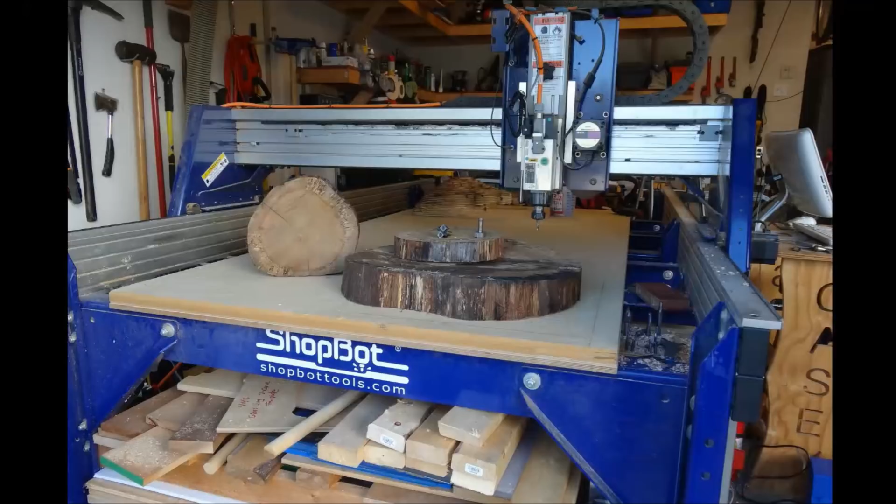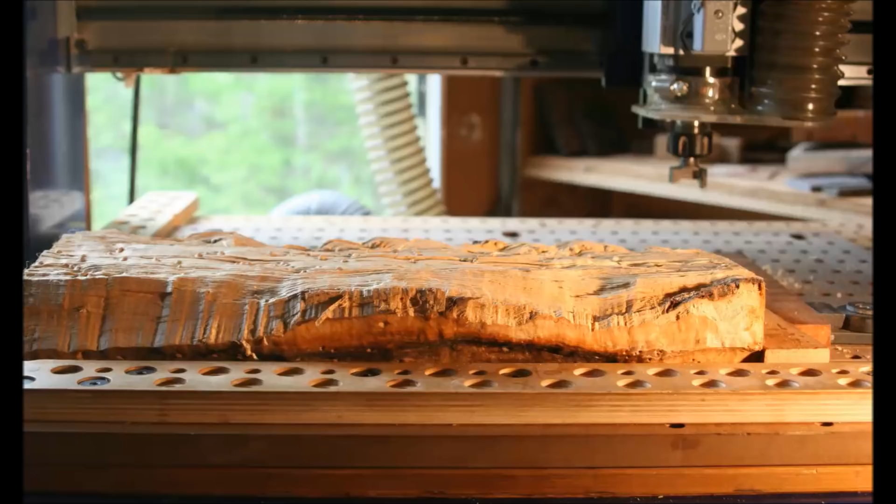So we're going to look at these being cut on both a ShopBot desktop and a full-size machine. And a lot of these are from downed trees, found log, firewood piles, and what we need to do here is get them on the machine, hold them down, and properly flatten them or parallel them depending on what the project may be.

So we're looking at furniture, clocks, different things around the house that you might use a slab for. But what we need to look at today is these two slabs and these different types of bits, putting them on the ShopBot, getting them cut on the ShopBot, getting them flat, getting them parallel, and let's get right to it. I'm going to reference two different style bits for today's tutorial.

The one is a spoil board cutter that a lot of you purchase with your ShopBot, and the reason I'm going to show you that one is it will work, and it's a bit that most of us commonly have laying around in our bit stash. It's just not going to give you as good of an edge quality as this insert based one that has two facing bits on the bottom.

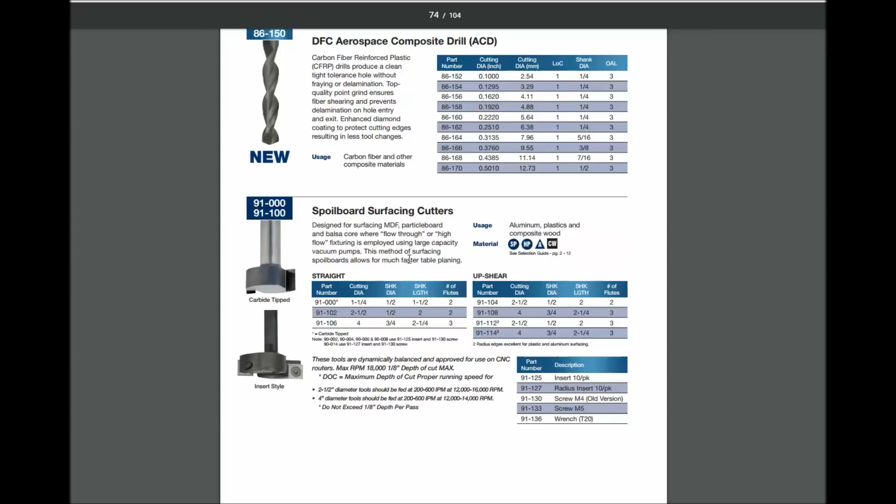So just to look at these, a lot of us are used to this carbide tipped spoil board cutter, which works, but just so you know, it is designed for surfacing MDF and particle board. It will work, and I'll show it to you in the video, but the one that's really going to get you a good edge quality for surfacing log slabs is this insert carbide bit.

And again, you can pick the brand that works for you, that you've used and you're happy with, but I use this bit for this tutorial and it worked great. Again, it will work great on your spoil boards as well, but it also really works well having these two blades along the bottom.

The other thing I really want to point out before we get into this tutorial is we're having a pretty large diameter bit that we're going to be plunging down into our material. So a couple tips would be, one is start the bit off from the slab that you're about to cut, meaning don't plunge directly down onto the material. That's a big, either 1 1/4 or 1 1/2 inch diameter bit that's spinning around, and for you to just jam that down into the material, it's going to be a lot of pressure on a lot of different components of your ShopBot.

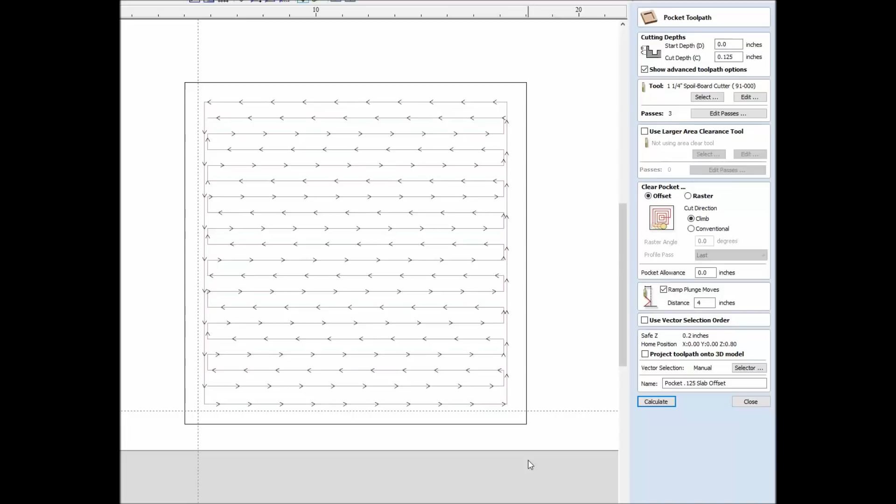The other thing that's really useful to add is a ramp. Have that ramp down into that cut. Don't just have it plunge straight down into your depth. Actually have that ramp down in. So you'll see that as we keep going, and let's go ahead and get started.

Alright, before we even get into the software, we need to look at the material we have at hand. So you can see I have some different thickness of washers to use as shims. Whatever you have laying around, I just like these because they're all pretty consistent. I have some fender washers that are around 1/16 of an inch, and then the regular USS flat washers are around 1/8 of an inch. And of course they do vary a little bit. So you could have some wood shims or whatever it is that you have around.

There's nothing flat about this log here, so you're just going to see me place it down. I'm checking to find the most uneven surface, and I'm going to put that one up first and try to mill it. The key right now is not to stress the log. You don't want to hold it down by pulling the warp out of it. You want to leave it naturally the way it is, shim it from underneath, and then mill that surface flat. If you pull it down too tight right now and stress it, and mill it flat, then as soon as you let the pressure off, it'll just bow back up.

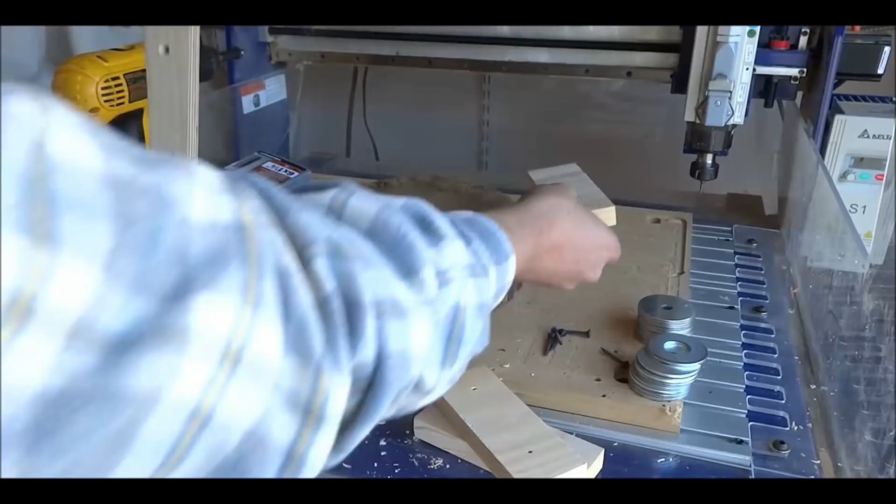So this is one process that's really neat about milling on a CNC machine that a planer can't do. You can actually mill the warp or twist out of it, or in this case obviously the uneven surface. So I'm going to use some wedges where I'll just wedge this from the side. You could also just line it up by eye like I'm doing here, holding it down tight.

And again, I haven't set anything up with the software or zeroed it out yet. I'm just trying to place the slab onto the table of my ShopBot. Put some good pressure on that, and I'm also screwing the wedges down just so they don't come loose, as we're going to be getting in there and milling this out.

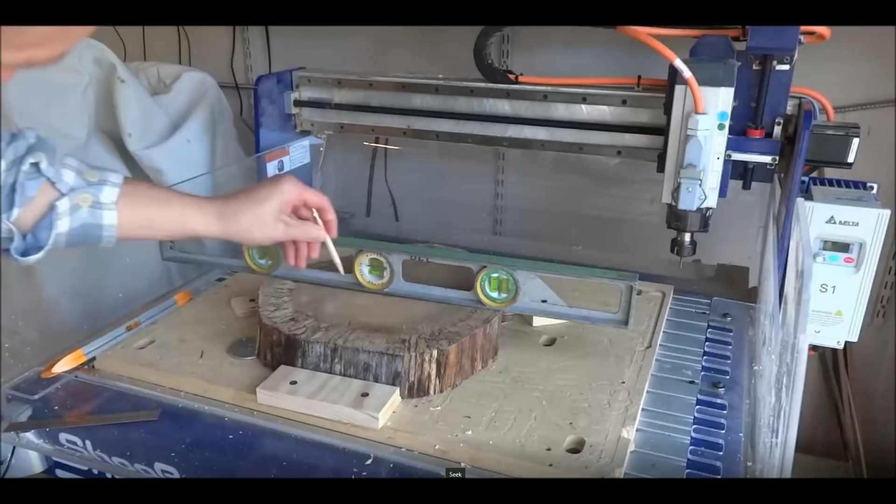And it's held down in there good and tight. Alright, next thing is we have the part held down, and we need to find our high and our low spot. So I'm just checking with the level to see where there's gaps, and I'm marking the different low spots so I can see. The level's nice because you can see how far from the highest to the lowest point the slab is actually off, and then I'm marking it with a pencil so I can see.

Next thing I also want to do is since this is held out in the middle of the ShopBot, instead of making a temporary zero, I'm going to use my default bottom left corner, and I'm going to measure over that it's 5 1/2 in the X and then 1 1/2 up in the Y. And then I'm also going to measure the size of the log, which is approximately a 12 by 12. So let's go set that up now in VCarve.

Alright, let's set up our job here. We're going to create a new file. We're on a desktop, so our cut size is 24 by 18 is our table. The material was actually a 2¼ inch thick slab, and since we're going to be milling the top of it, we're going to zero to the material surface, and I'm going to leave my XY the bottom left corner, and then what we'll do is we're actually going to set the log in place off this bottom left 0, 0. So I'm going to go ahead and hit OK.

And the measurements that I wrote down on the ShopBot spoil board was my X was actually over 5½ inches. So I'm going to grab this layout line so we can see this. I'm just holding my left mouse key down and I'm going over 5½ inches in the X. And then in the Y, if I drag one down from this layout ruler, I come up and that was 1.5 inches. So this is where we actually have the bottom left corner of our round slab. So what we need to do is draw a vector the size of our slab, and then what we will do is pocket it down that we need. So there it is laid out.

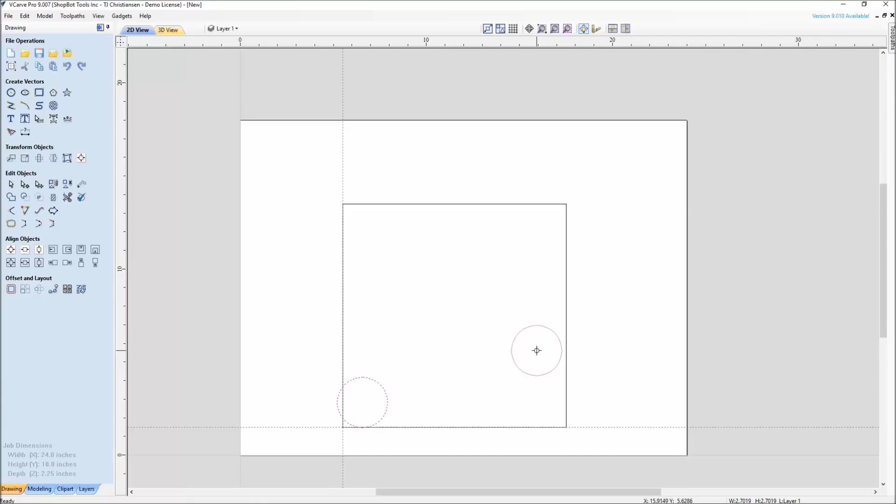it's ramping down in speed. So we're not getting the full speed of the pass as we go across here, which, again, isn't a problem. We're not trying to set a time record here, but what we're getting is it's slowing down, which isn't going to get as smooth of a cut. So what I prefer to do when I'm milling these is to go out past where my log is going to be, bring it up here to the next part, and then mill over here past. And you'll see this in the video, but you actually mill out past this size of your cut material.

So let me delete that, and what we'll do is we'll actually do an offset that's offset out a little bit larger than our log size, and we'll do that just a little bit over the bit diameter. So if we're using the 1¼ inch for this one, what we'll do here is we'll actually go out 1.5 inches so it brings it out past, and we'll select the new, and I am going to leave the original one on here just so you can see.

And then what we'll do next here is we'll set up the pocket, and again we're just making this larger rectangle here so when the bit goes out to make a next pass over, it's not doing it above our work surface.

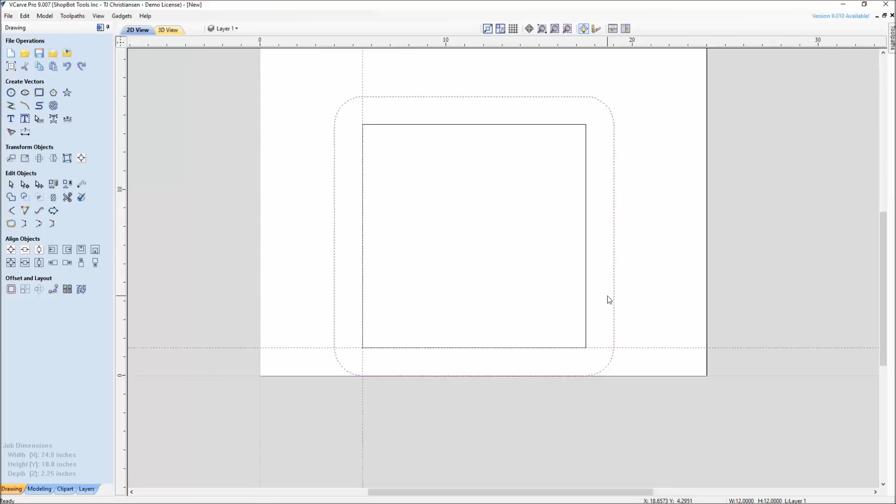So let's switch over to the toolpath side, and this is just a pocket toolpath, and the log itself was only about 7/64 as far as being out, which is just 0.1093. So I'm going to take it a little bit deeper so I get one nice clean cut over the whole surface. So I'm going to take a 1/8 inch cut overall, and for this I'm going to select and use that 1¼ inch spoil board cutter.

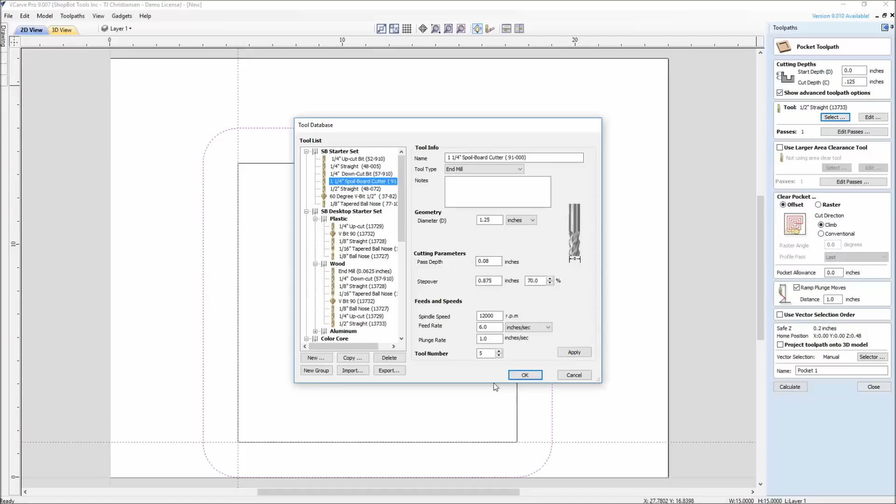So the first one that we'll see in the video is the one that just has the 2 fixed carbide cutters. So let me select that, and I'm going to call this my pocket 0.125 slab. And what I want to make sure that I do is add a ramp to this. And I like to add a good hardy ramp on this because I don't want to be slamming that 1¼ inch spoil board cutter down into this log.

And again, if you're going to do an offset here, it's going to start in the middle, where if you do a raster, you can have it do its profile pass first, where you can actually get it to start down here in the bottom corner, where it's not starting above the slab. So it's up to you which one you want to do, but those are my recommendations. And then go ahead, preview this.

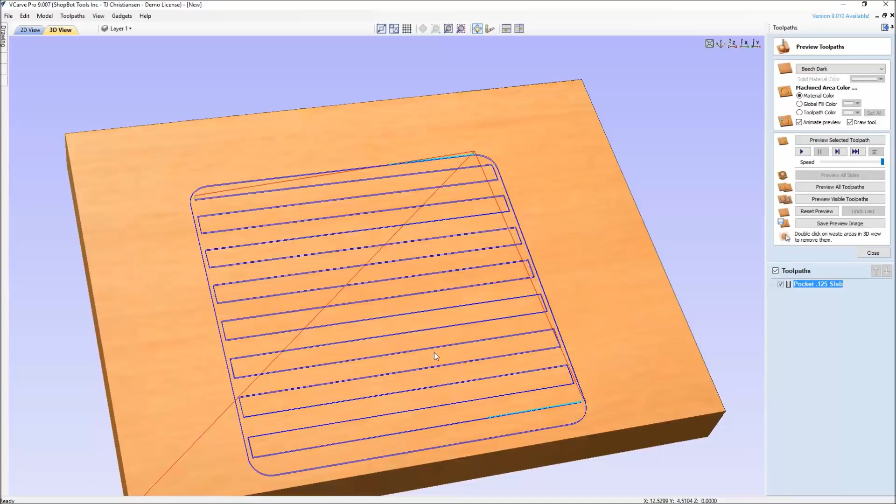You're not going to see the uneven surface that you're going to have out on your ShopBot, but you will see what it's going to do. It's going to make its multiple passes. And then let's go out and take a look at it in action.

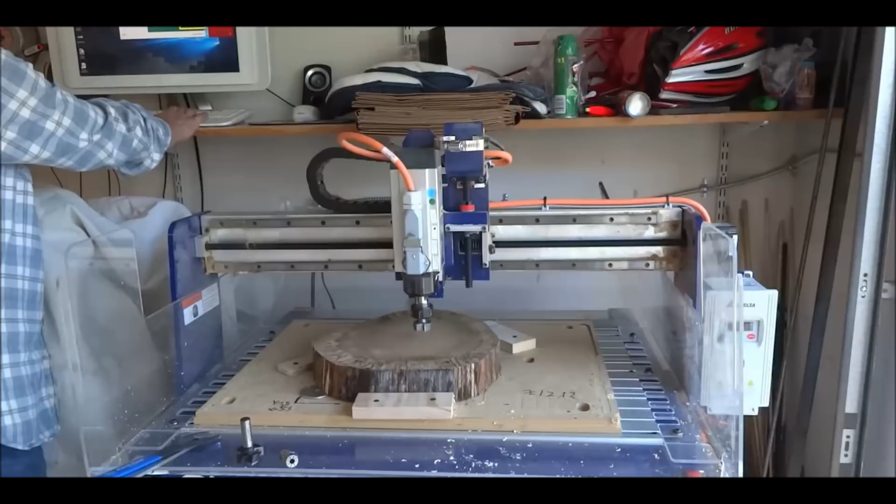All right, first things first, let's zero out our machine. So we're doing the X and Y by using the proximity switches. So zeroing our X, zeroing our Y. Then I'm going to use the keypad and move it over here to zero it out. Now notice the first demo we're going to do is using the 2 carbide, and then finally we'll switch it over and I'll show you the difference in edge quality that you get using the bottom carbide.

So I'm going to the high point back here where I'm going to start. I don't want to mill it all off at once. I don't want to stress it out and try to take off too much. So I started and I zeroed it to the high point, and here we can see that it's working its way. It's not cutting on the front of the slab because that's where it's lower, but as it moves towards the back, it's starting to cut into the deeper part of the slab and getting it fairly flat before we make the full pass all the way over.

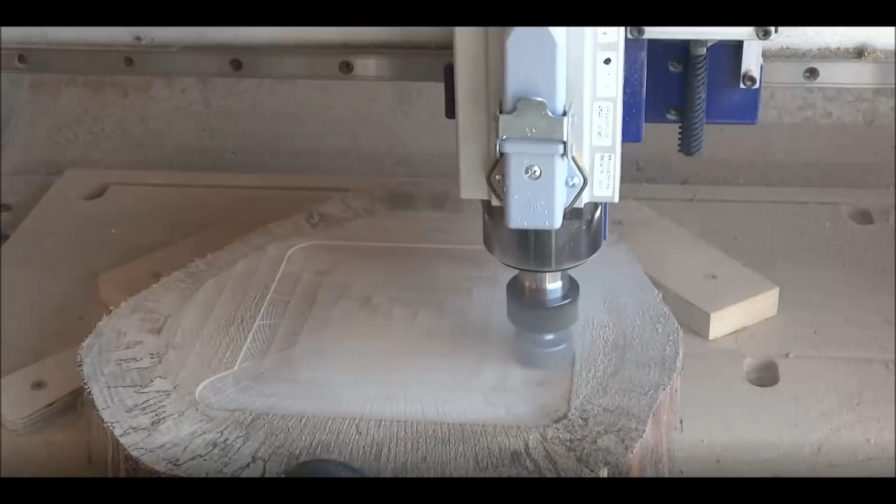And here you can see on the next pass it's starting to go down deeper in. And this is the edge quality that we get here with this first bit. You can see the lines more than you can feel them. Right now it's just an appearance thing. You're not going to feel those with your fingers, but you can still see them.

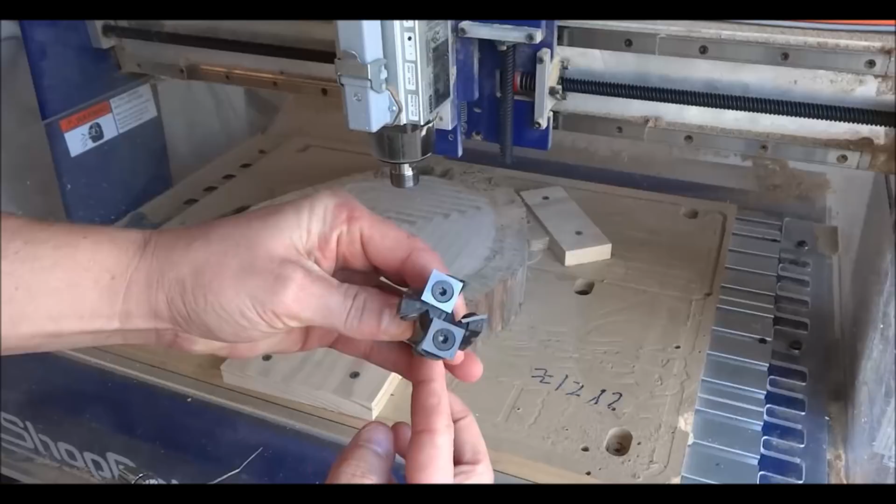Alright, so I took that first bit out, which did a fine job. Again, it just leaves some lines, something that you can sand pretty easily and get rid of. However, why not use a better bit for this job, which is this guy here. There are several different brands that make this, but this has the 2 cutters on the bottom, the 2 face cutters, and it also has the 2 side cutters.

I really do like these carbide tip bits because they have 4 different sides to them. So if you were to hit something and not completely wreck it, you can rotate those 4 different times before you have to replace the carbide.

So since I've already gotten it flat, the log face is flat, I'm just putting the new bit in, re-zeroing it, go back to my V-carve and use the same file and just creating that same pocket that I did. I'm just creating another tool path that's only 30 thousandths go down in just to get one more clean pass all the way across to clean that up.

And again, you do want to use a ramp for this. This is ramp back and forth as it went in there. Even with that carbide bit, I didn't like how it ramped in the middle. So I went back after this and changed the tool path to start off to the side. Just something about jamming that big 1.5 inch diameter bit down into a log is a lot of stress going on. So you get a little bit better edge quality when you start it off to the edge.

And you can see there's a little bit of surface there, not so much as far as what it leaves, but nothing you couldn't clean up real quick with the sander doing it that way. Pull the front side off, take out the wedges, make sure underneath your spoil board is clean, pull the wedges out of there, and just blow that off with your air compressor, dust it off. And now that side is flat, and that should sit down there good and flat.

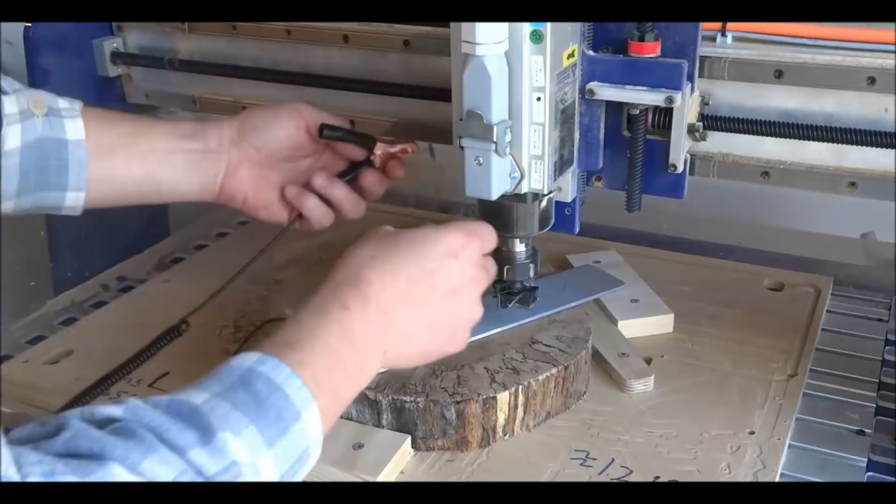So now we have another uneven surface. This was the better of the 2 surfaces, so it's not going to take as much work, but we should be able to sit down flat. Put our wedges in, we held them. I'm leaving the 4 cutter carbide tip in this time, finding my different level where I'm uneven, and I'm going to mark my spot. And then just to save video time, I went back to the V-carve file, used the same size blank. All I did was change the pocket depth to what I needed to mill down, just like we did on the first side.

And then again, set that up. But this time I want to make sure I got my ramp over here to the left-hand side where it's going to ramp itself down in before it plunges in. And then you can see it goes out past the log as it makes the milling. And see where it does the turning where it's on the log isn't going to give you as good as where it goes out past. So I try to show you that both on the one side and the next there, where you can bring it out past the log to make its turn over to the next pass.

And then finally here it does the last pass where it's going to make itself down to full depth. And that's the final clean pass that goes all the way across. And with that 4 cutter, it really leaves a good edge. You're not seeing as many lines. Even what you do see, you're not feeling it. It's something that'll clean up real nice and easy with a disc sander.

So put that on there, and now you've pretty much successfully cleaned up your log faces. Got them parallel, got them flat, a little bit of edge work around the side for whatever smooth corners that you need to put on it, and then that log now is perfectly parallel and ready for what you're going to do with it next.

Well, let's look at the same process here on a larger slab on a full-size ShopBot. So I've taken my spoil board and marked a 2-inch border along the X and along the Y. As before, use whatever method of shims that you have laying around to flatten that log. I've got my level up there and I'm checking for low spots.

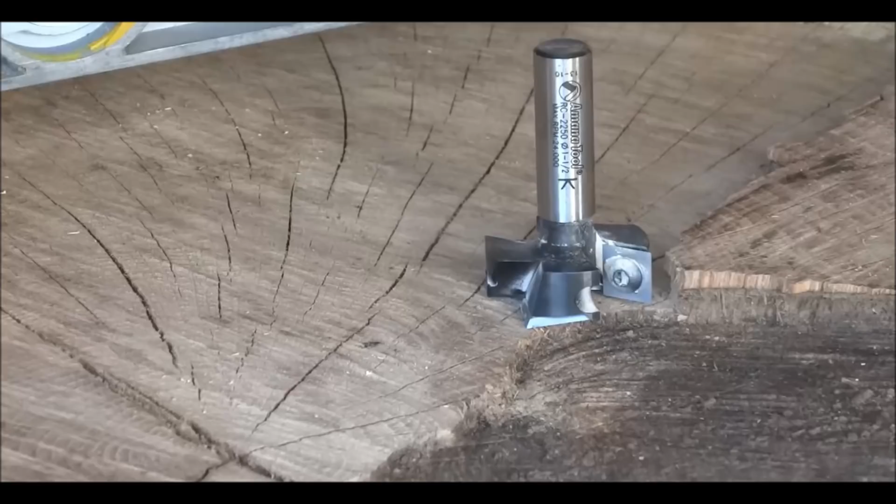And this one being a lot larger slab has a lot bigger of a gap as far as slab height. You can see right there that the chainsaw really did a number. It's almost as deep as the length of my cutter. So again, I got my shims in there. I got this shimmed. I got it bolted down onto the spoil board.

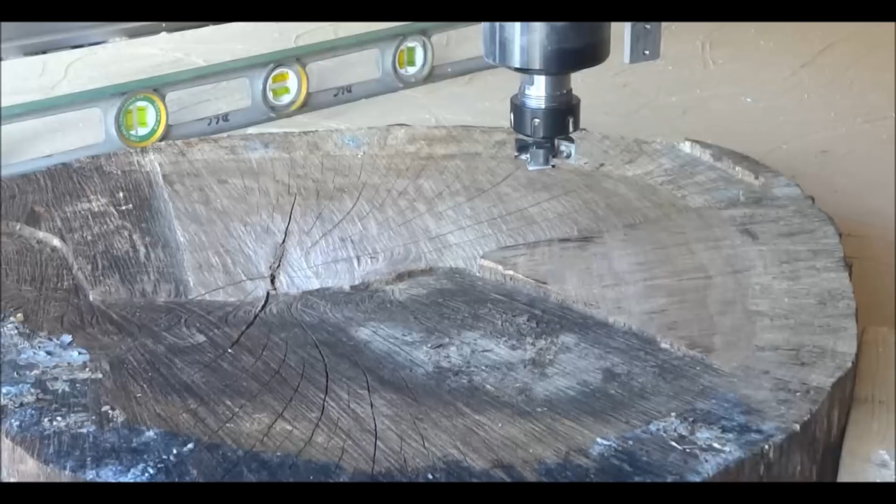If I was to reference back to the software, this would look just like the first example. Went in there, drew my rectangle, offset a little bit larger one, so when the spoil board cutter there is making its passes back and forth, it's going out past the actual log size. Here you can see that it ramps in down in that bottom left corner. I don't want it to ramp right into the middle of that wood. That's a lot of bit to be jammed down inside of that material.

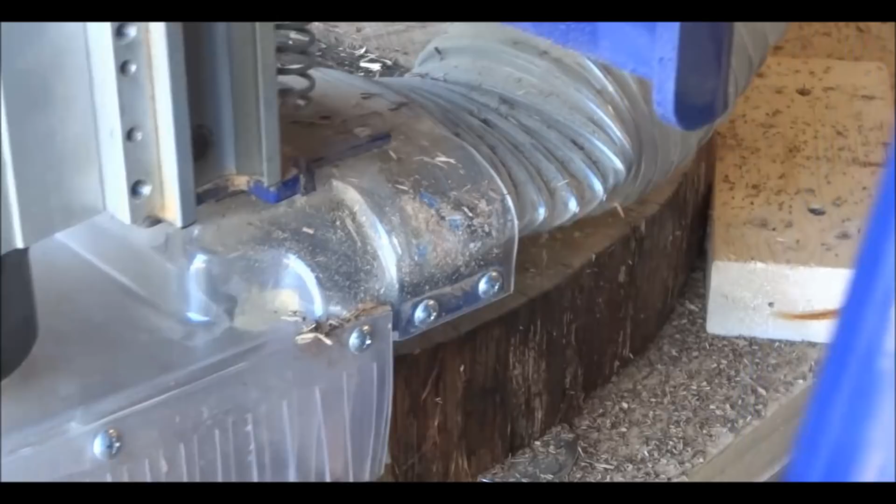So that's why the cut actually starts off to the side, and you can see here it's not very even. It's almost 1/8 of an inch on the ends, where in the center it's less than 1/16. And it's really hard. You're cutting against the grain in every which direction here. You know, a log as it grows with its annual rings is growing around all the way each year out, and if we do an offset pass, we're still coming through this thing cutting against

the grain. So you can raster or offset as far as the way you want to toolpath this, but I find with this bit just going back and forth along the x-axis here, I get just as great results that I can just pull this thing off at the end. A little bit of sanding with a random orbital sander.

Same process as before. Flip it over, go back to your VCarve software, see what you need to do for the next size as far as how far down you need to go, create another pocketing toolpath, and this is really the key to paralleling and flattening slabs.

So just to show you a project that you could do with your slab, you could either probe the profile of your log, or in this case I took a picture of it and brought it in and did a bitmap trace, and let's show you that in the Vectric software. So here you can see the bitmap that was brought in. I took a picture straight down of the log, and then whether you do a bitmap trace or you use the draw curves, you can see I drew the outline of the vector.

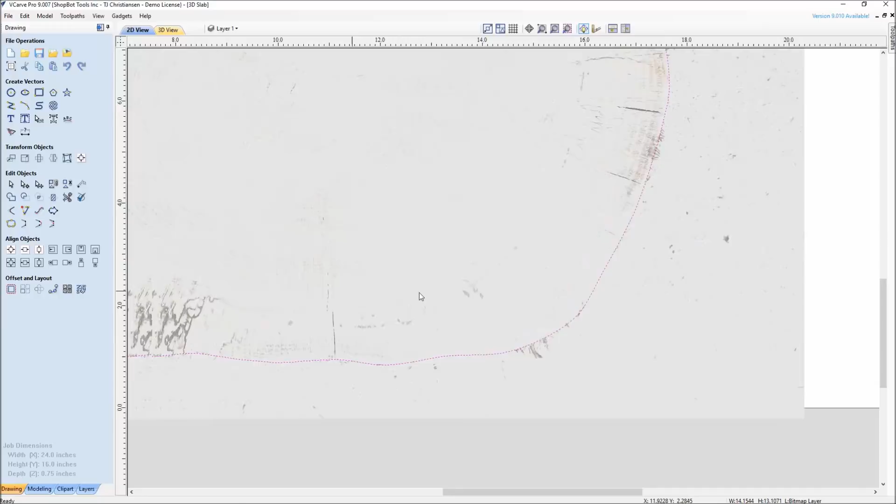And also what you want to do is take a tape measure and measure across. In this case I measured across at the widest point and got my measurement. And then you can see that here in the bitmap layer. If I turn this off and just have layer 1, you can see that I actually stretched it to the size that it needed to be to fit the actual log. And then you go along with your toolpathing like you would a normal project.

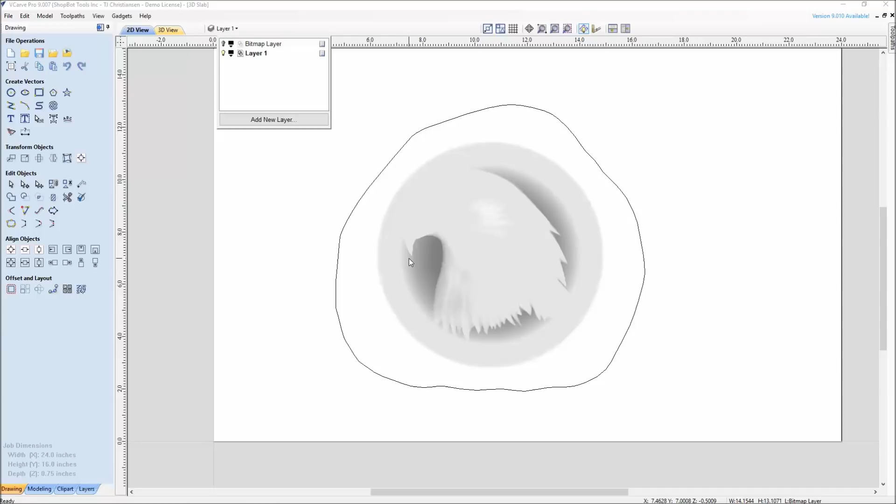So let's go ahead and show you some pictures of how I went about sizing this. So here's our picture looking down at the log. I took my tape measure at the widest point, measured across. Zoom in here, I can see that it's 11 13/16, and that's what I scaled it to in the Vectric drawing software. And then I went ahead and toolpathed it like a normal 3D file. And here you can see that it's starting to carve with a 1/16 inch tapered ball nose. It works its way down to the deepest point.

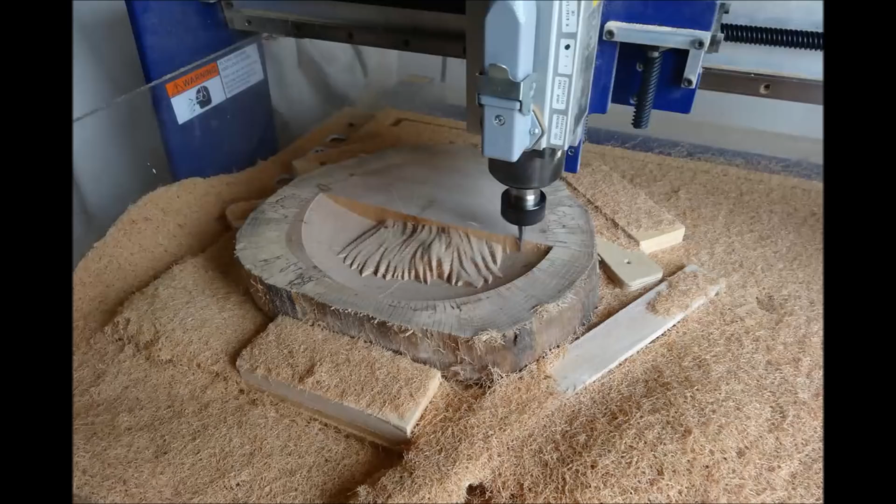And the eagle looks real good on here. I like that model. It has a lot of detail. It breaks up real nice where it's rough in here. We can see the feathers, and then it's smooth out here, bold down in. It just gives a nice contrast. And as it finishes up, we can see that there is the eagle head in the model. Put a little finish on it. Turned out great. Need a couple more coats to make it look ideal.

But what we did here was we took a slab that was not parallel, it was not flat, and using our ShopBot CNC machine, we were able to flatten the log slabs, we were able to parallel the slabs. So just a couple things to keep in mind: when you're first starting to mill your material, you don't want to pull down too hard on your blank where you're actually going to pull the warp out when you're holding it down, because as soon as you let go of that clamp, it's just going to warp back up.

So let it sit on there pretty freely. That's why I blocked it in from the side, milled the top flat, and then when we do our parallel flip, we're not only smoothing the second face, but we're also paralleling the two faces. So try this out with your slabs.